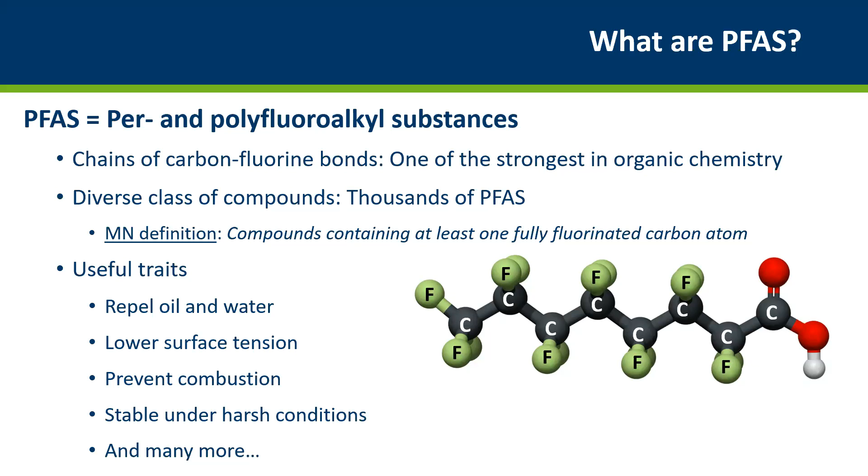This is a pretty broad definition. There's a few different possible definitions out there, but this leaves us with a class of diverse compounds consisting of thousands of different PFAS chemicals. So because of all of the useful traits of PFAS, these chemicals have been widely applied in industry and commercial products since about the 1950s and continuing on to today. Their uses range in a variety of different kinds of applications, from consumer products like paper and food packaging to more industrial products such as pipe linings for oil and gas.

The uses of PFAS are numerous and sometimes hard to predict. Again, there are thousands of different PFAS compounds out there that really have a wide variety of different uses across industries. Some of these are better known, but some of these can be really challenging to know about and to identify.

So just a little bit of background about Minnesota's work on PFAS. In February 2021, the state of Minnesota released our PFAS blueprint, which really supports a holistic and systematic approach to addressing PFAS. PFAS work has been ongoing in Minnesota since the early 2000s, and Minnesota has been a leader on PFAS work in many ways.

But what this blueprint really sought to do was to provide kind of a unifying framework across all of the different programs within the Pollution Control Agency and our other state agencies working on PFAS, and really provide a strategic path forward.

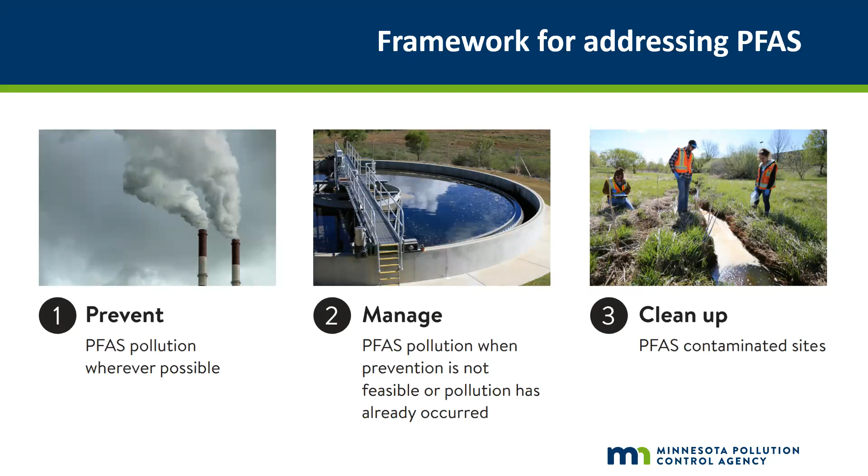From there, they make their way to our homes via consumer products, or can be discharged directly to wastewater treatment plants or directly to groundwater from the industries in which they are used. From there, water can be conveyed to surface waters or leached into groundwater. PFAS in products ultimately end up in landfills or incinerated, and then travel along either air pathways or water pathways to ambient environmental media.

So this cycle of PFAS really encompasses all of our environmental programs here at the Pollution Control Agency, from industrial permitting programs to municipal waste treatment and management programs, and on to our programs that deal with addressing contaminants in surface waters, in fish, and in drinking water. So we really identified as part of the blueprint a need to better understand these industries upstream that are producing or using PFAS, to be able to address PFAS more efficiently across our programs.

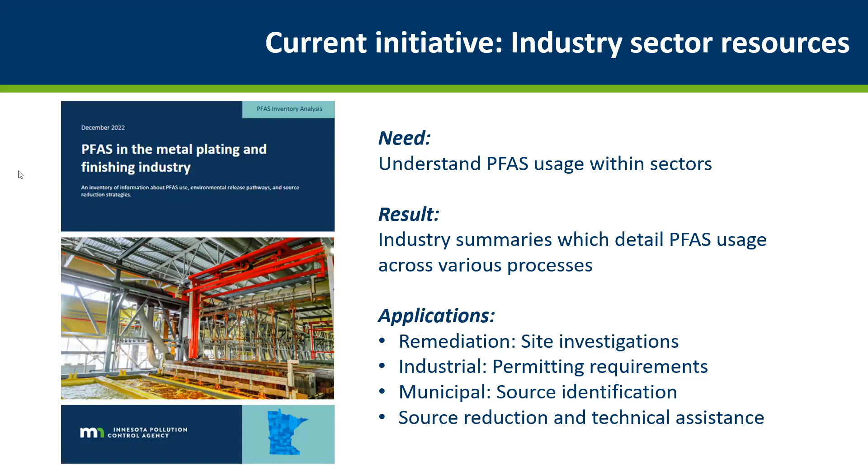So kind of the framework for this industry sector research is firstly a basic understanding of what these industry sectors are engaged with, the different processes that are occurring within businesses, and why PFAS is being used. As part of this report, tailored to Minnesota specifically, we sought to understand what the presence of these industries was like in Minnesota, and what we can kind of expect to see as far as PFAS work within these specific facilities that we have in our state.

And so the next part of this research is to identify how PFAS are released to the environment from these industries. Why are we concerned about PFAS use within these sectors? And then how can future releases be minimized?

So the first set of industry sector resources focuses on PFAS uses in the metal finishing industry. So metal finishing is a general set of processes that seek to provide strength and durability to parts that are used across a wide variety of industrial and commercial sectors, including the auto industry, aerospace applications, and even furnishing and building industries.

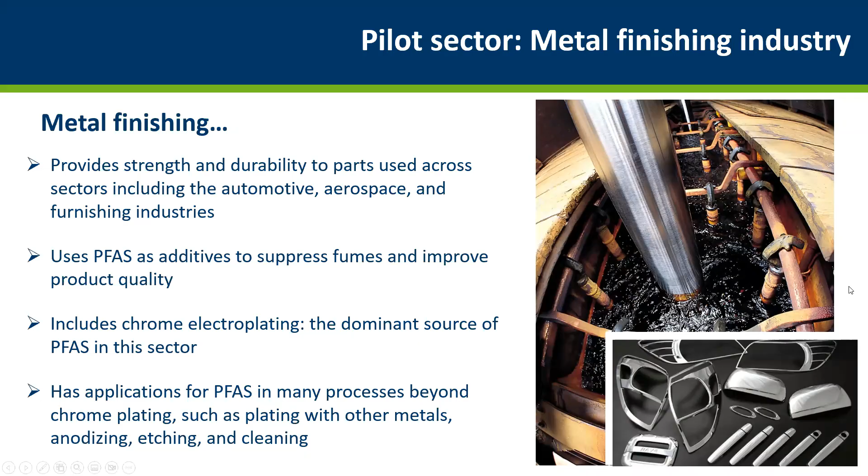So we chose to focus on metal finishing for the first leg of research as part of this project because it's been shown widely in other states and in some federal studies conducted by EPA that metal finishing facilities tend to be a major industrial source of PFAS to wastewater treatment plants across the country. Metal finishing in Minnesota specifically is a pretty large industry sector, representing a significant portion of GDP here, with a number of facilities dispersed across our state, both within the metro area in the Twin Cities, as well as in outer Minnesota.

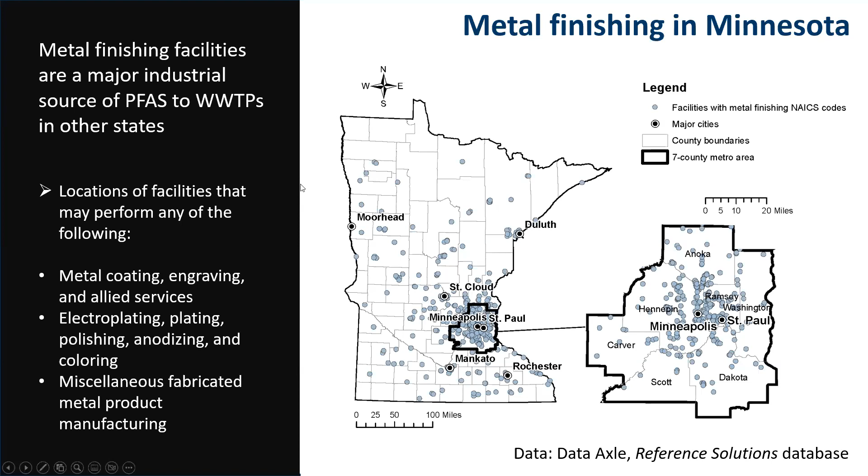So I want to go over a little bit of the history behind chrome plating and metal finishing, and to provide some of the context for how PFAS has been used and regulated throughout this sector. So chrome plating with hexavalent chromium began as early as the 1920s, but it wasn't until the 1950s that we saw the first PFAS-based fume suppressant enter onto the market and begin to be used by the industry widely. This was around the time that PFAS-based surfactants started to be adopted generally by different industry sectors. So until the 1950s, hydrocarbon-based fume suppressants were largely used by the industry in order to suppress chromium fumes, primarily as a worker safety measure. But PFAS became adopted in the 1950s.

In the 1970s, the use of plating with trivalent chromium began to be adopted by the industry. And this is important because trivalent chromium tends to not be associated with PFAS use quite as heavily. However, I'll note that trivalent chromium is not necessarily applicable to all industrial needs. It tends to be used more heavily for decorative applications.

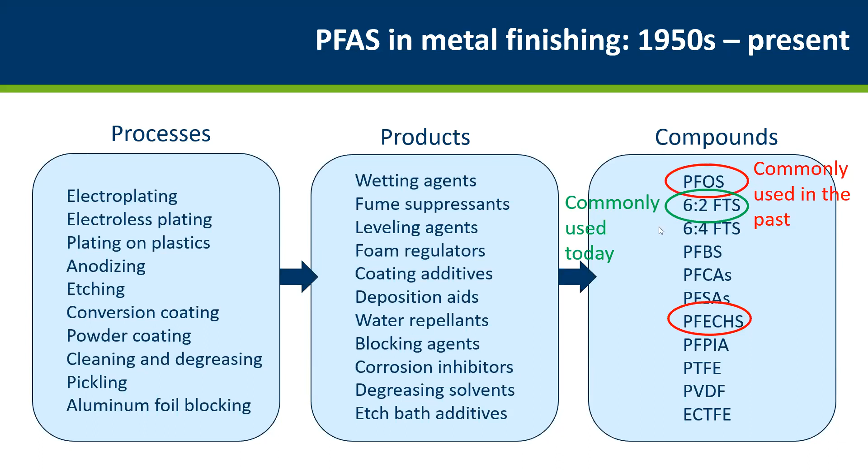However, a number of other PFAS compounds have been used throughout history, on less common bases. Some of these have been identified through the patent literature, others from more industrial sources. But as you can see, there's really a range of different compounds that we're looking at within this industry beyond these three more commonly known chemicals.

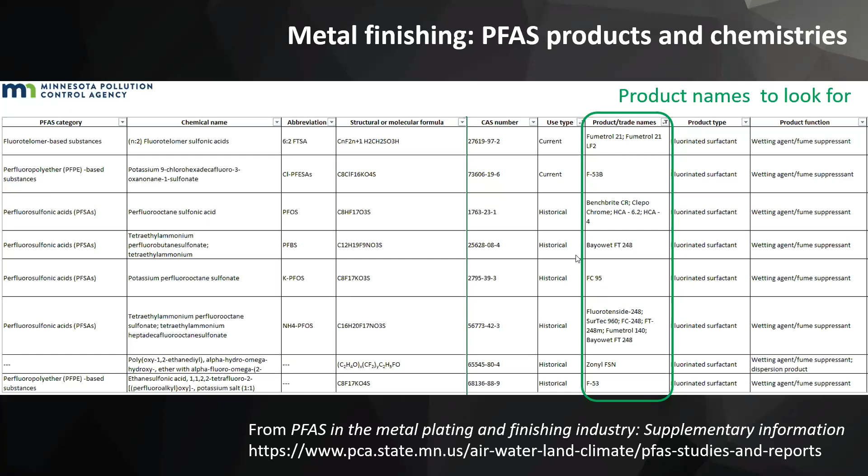We provide chemical information such as CAS numbers and structural formulas, as well as some background about what function the PFAS is serving within these products and any identified trade names that we were able to find from the industry sector. So you can think of this trade name or product name column as something that you would want to look for if you were an industrial user looking to identify the possible sources of PFAS in your processes, or if you were a business assistant to one of these facilities.

All right, so shifting gears a little bit, we've covered the different applications of PFAS within the metal finishing industry, but I want to talk a little bit about how PFAS is ultimately released to the environment from all of the processes identified as part of this research. So really the primary way that PFAS is conveyed from this industry tends to be through the industrial wastewater streams.

If you think back to that image of the chrome plating bath that we saw earlier, those contain a level of PFAS in them when PFAS-based mist suppressants are applied, as well as any other PFAS additives that have been applied. And so those PFAS get discharged when those plating and finishing baths are changed out. Those baths tend to be changed out by industrial facilities on the order of months.

A secondary source of PFAS to the environment is through air emissions. PFAS escape through these baths, which tend to be open to the air and can be emitted either as fugitive emissions through vents or emitted through stacks if there are not other engineering controls present to remove PFAS from air emissions.

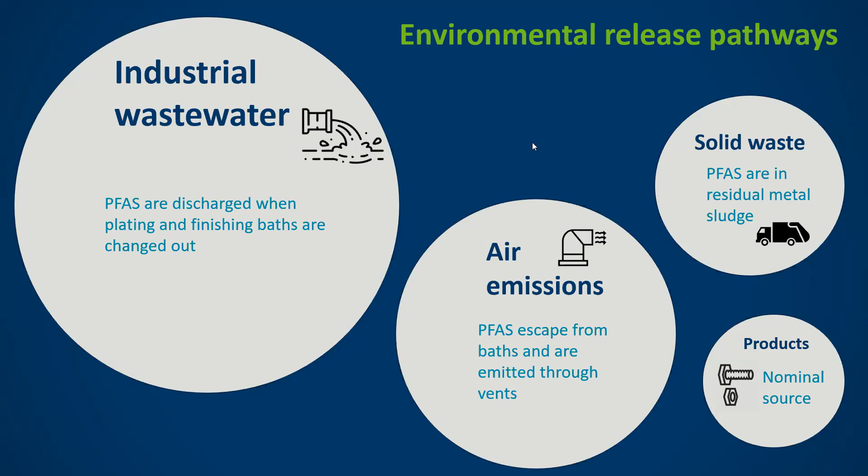So a point that I want to make is that while discontinuing the use of PFAS is a really important tool for source reduction from the metal finishing industry, it's been demonstrated through work in other states that PFAS emissions can continue to occur long after PFAS is phased out in the products being used by facilities.

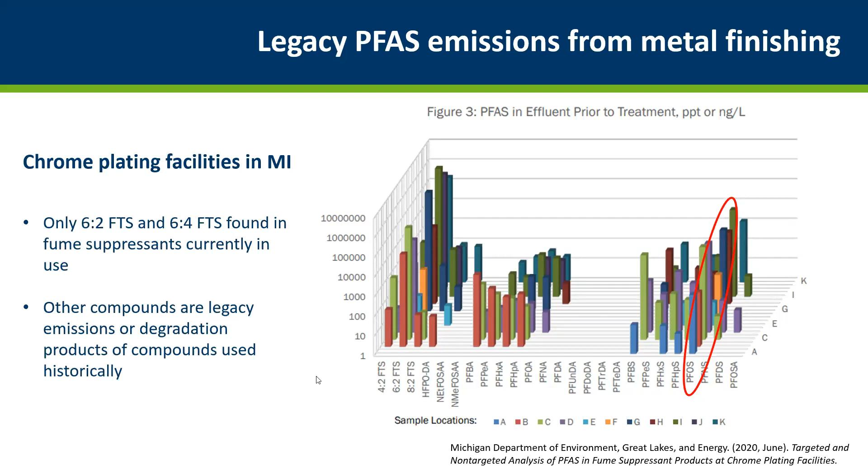And I think that this is an important point to recognize. PFAS tend to be very sticky. They're very good at sorbing onto different kinds of surfaces, and so can become trapped in pipes and vents and equipment present at industrial facilities. Also taken from this report done by Michigan, industrial pretreatment tended to be very successful in fully eliminating PFAS emissions.

So some other source reduction strategies that we identified as part of this research. Of course, the most important and lowest hanging fruit is going to be to eliminate use of PFAS in products wherever possible. Another is going to be to phase out uses of chromium wherever possible, and particularly hexavalent chromium. PFAS is largely used in order to suppress chromium fumes. So in processes where chromium can be substituted out for a less toxic constituent, that can have upstream effects on the amount of PFAS that is needed to be used in processes.

Cleaning or changing out equipment wherever possible can help reduce some of those legacy emissions of PFAS. Air scrubbers can be very good tools for reducing PFAS discharges through vents or stacks. And finally, using closed coating reactors can be helpful in suppressing fumes and eliminating the need for PFAS-based fume suppressants. And of course, we covered the option of wastewater pretreatment in the event that other control measures have been taken and PFAS emissions continue to occur.

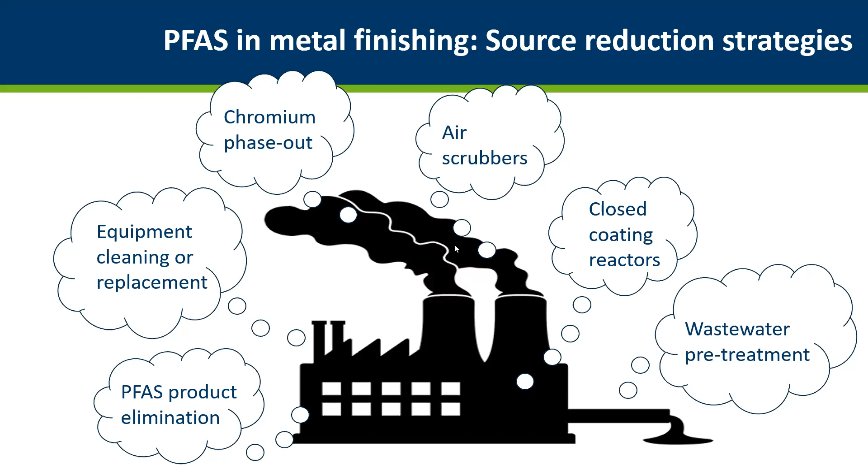So you can find these published industry sector summaries on MPCA's website under our PFAS Studies and Report webpage. The report on PFAS and metal finishing is up there, along with the second report that we've completed on PFAS in the textile and leather industries, which was another priority sector that we were interested in better understanding within Minnesota.

And so we plan to develop additional sector resources based on different program priorities and informational needs that come up. We really learn more about sources of PFAS every day. And so, continually doing this work of identifying the sources and identifying ways that we can start tackling these sources is going to continue to be important for as long as we maintain our PFAS program work in the state.

I did want to touch on some other relevant PFAS source identification and reduction efforts that we have going on within Minnesota. Another complementary project to the one that I just presented is an initiative that we completed this year on PFAS source evaluation and reduction. This project was born out of a legislative appropriation that directed our agency to reduce sources of PFAS to municipal waste treatment and management facilities.

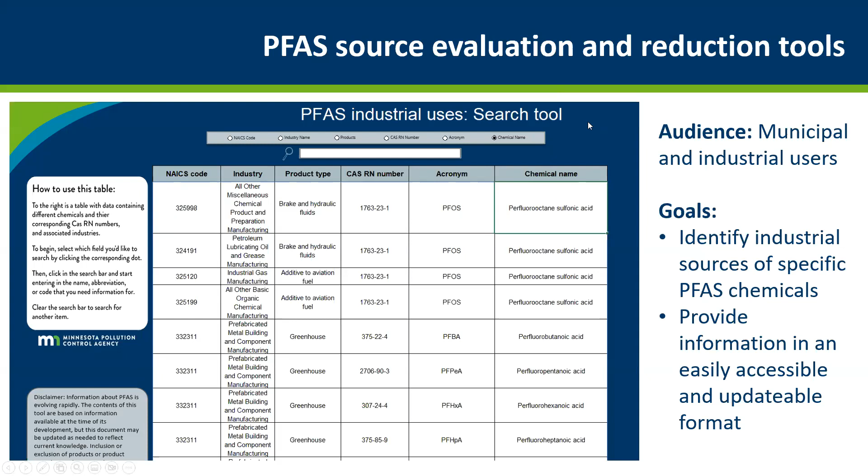If you see a specific chemical come up and want to quickly get an overview of what kind of industry you may be looking at as a source of that chemical, this provides kind of a starting point for folks that are embarking on source reduction work.

One other effort that's been going on within the state is actually being conducted by the Minnesota Technical Assistance Program at the University of Minnesota. So MNTAP has been doing some great work on PFAS source reduction via a grant provided by EPA. This is a 3-year grant and has been divided into a 3-phase project with the goal of preventing PFAS pollution and ultimately limiting human exposures to PFAS.

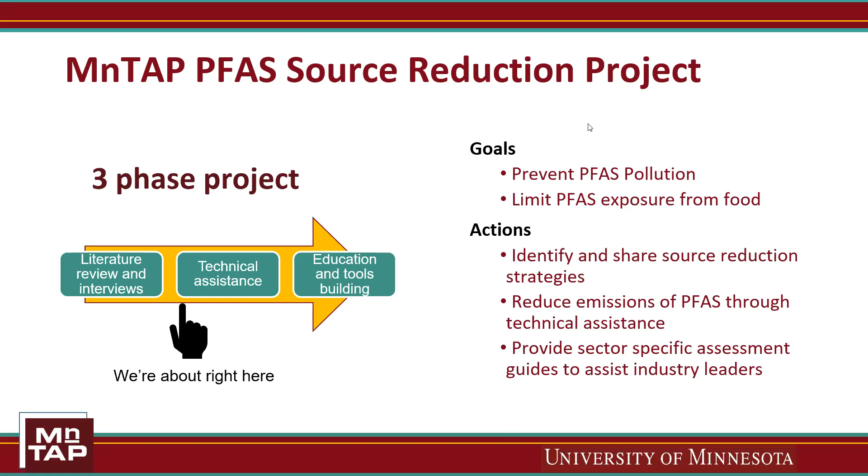So MNTAP has been focusing on 3 main industry sectors as part of their project. One of those is the metal manufacturing and fabrication industry, which I covered. And they're also looking at the food and beverage manufacturing industries and the chemical manufacturing industry. And so one of their key goals, which is very complementary to some of the work that we've been doing on a state level, is to create resources that can be provided to both municipal and industrial users.

They are starting to develop a very nifty PFAS source mapping tool to provide to wastewater treatment plants that provides information about different potential sources of PFAS within a geographic area. And they're also developing some industry-specific assessment guides that can be used by folks to determine where to start looking within their operations to identify PFAS and again, provide some source reduction strategies.

So these 3 projects are just 3 efforts that we have going on in the state. And really what they have in common is they're all meant to provide resources to folks that are working on PFAS source identification and reduction. The universe of PFAS is very broad, and we've been working collaboratively with others in MNTAP and elsewhere to share information that can help make these resources as thorough and as useful as possible.